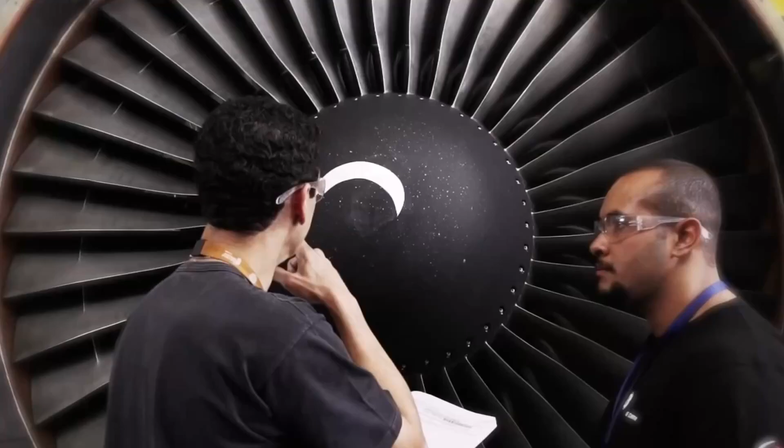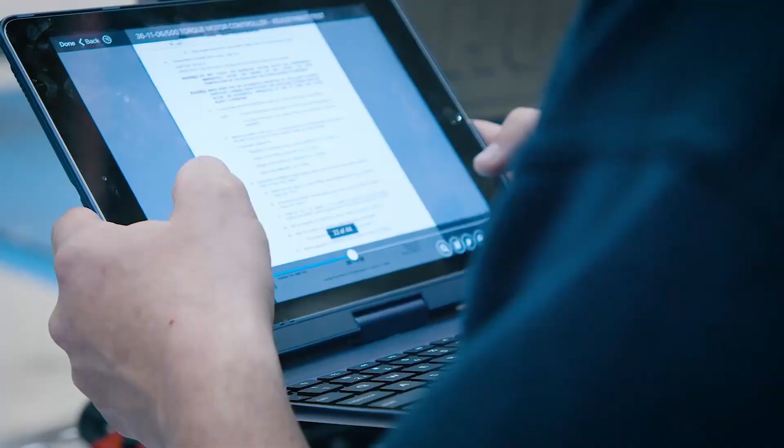When engine aircraft designers get it right, their creations can become legendary. However, history is littered with lost and extremely superb aircraft engines. So in today's video, we are going to show you aircraft engines that might be out of the future.

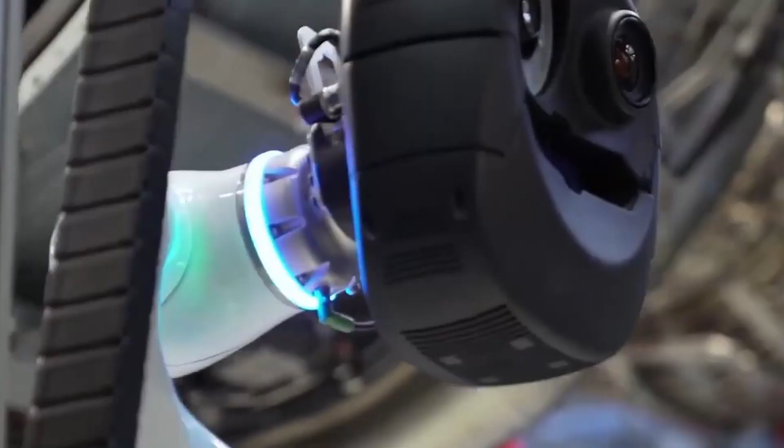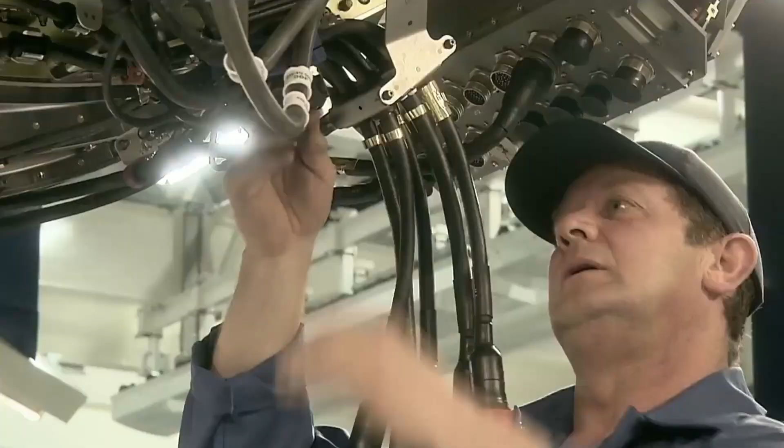First on our list is the engine from CFM International. GE Aviation and Safran have joined forces to form CFM International. It is responsible for the LEAP, dubbed the dominant narrow-body engine of the future, and the CFM56, the best-selling aircraft engine in history. Even though both engine families are more efficient than their predecessors in fuel consumption and carbon dioxide emissions, their potential replacement is being hailed as the future of flight.

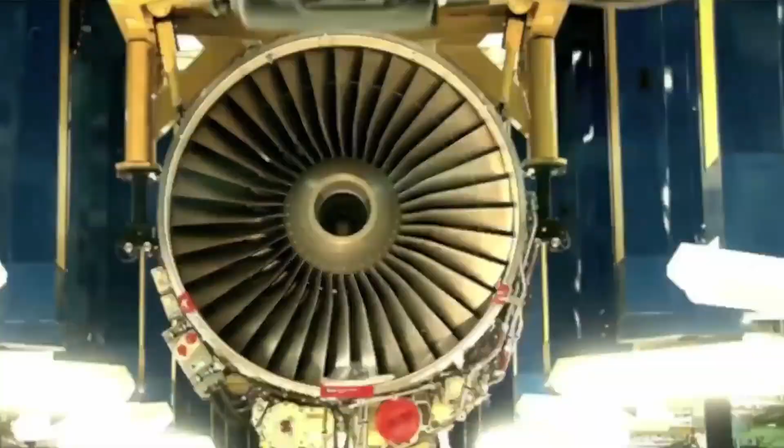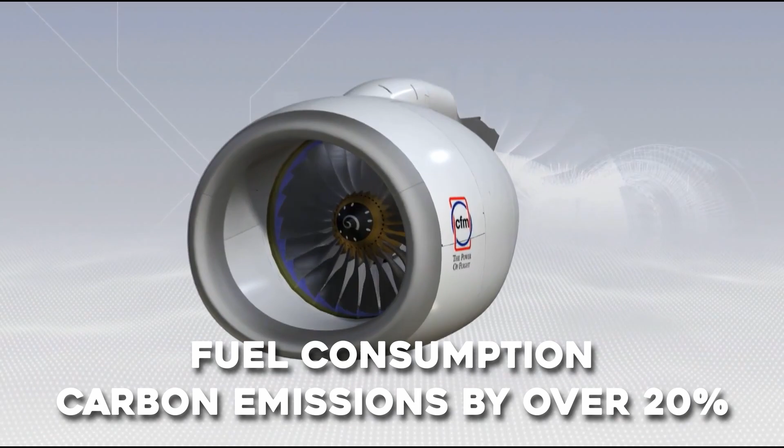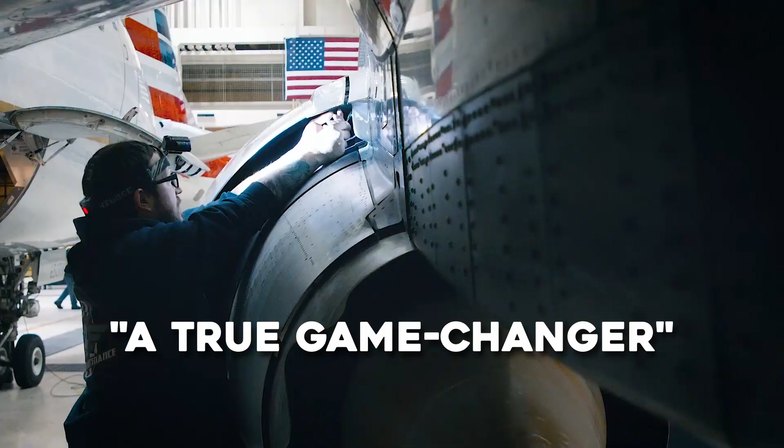In June 2021, CFM introduced its new RISE, Revolutionary Innovation for Sustainable Engines program. According to the company, this program will have produced the next generation CFM engines by the middle of the 2030s. The program's objective is to reduce fuel consumption and carbon emission by over 20%, and it will utilize both sustainable aviation fuel and hydrogen. The CEO of Safran, Olivier Andriès, stated in a video that the program would be a true game changer and write a new chapter in aviation technology.

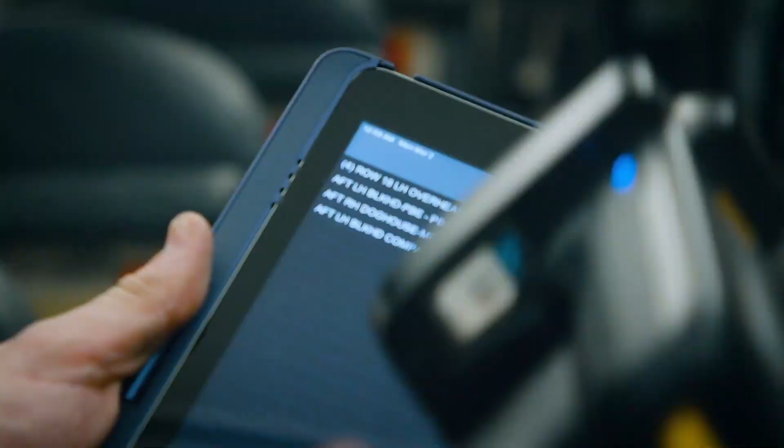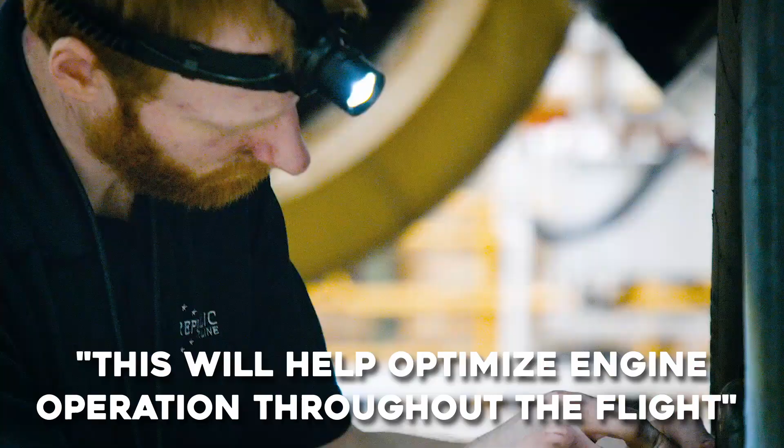The RISE program's open fan architecture is its most important component. The executive manager of systems engineering for the CFM RISE program, Delphine Dijoud, described it as the most ambitious and most useful portion of the plan. This will help optimize engine operations throughout the flight, explained Dijoud, resulting in further efficiency gains and reduced emissions.

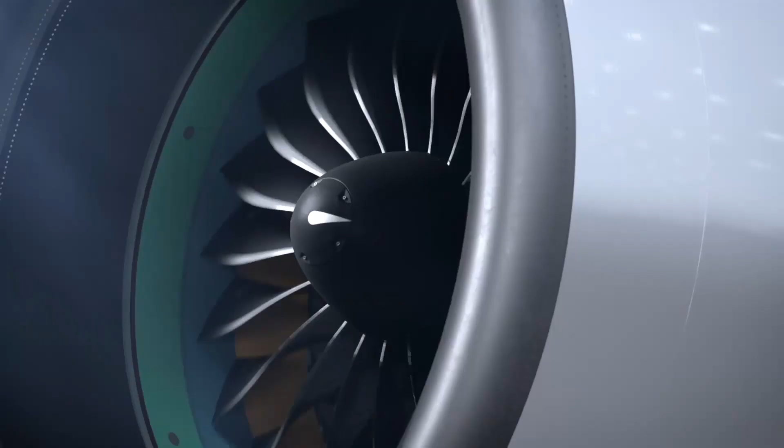Pratt & Whitney produced the second engine on our list. Pratt & Whitney is one of the largest manufacturers of engines for commercial, regional, and military aircraft. On the commercial side, the PW1000G, which powers the Airbus A220 and the A320neo family, is most likely its most recognizable product. There are 6 distinct PW1000G variants.

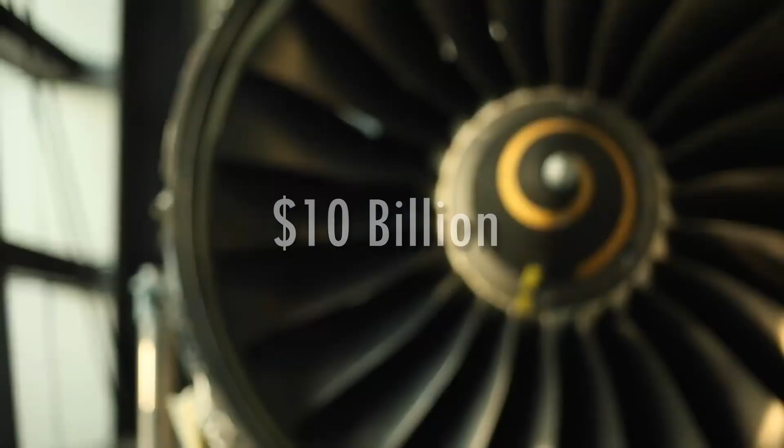Since they all possess geared turbofans, they are also known as the GTF family. More than 1,000 aircraft are equipped with GTFs. Jeff Hunt, the company's senior vice president of engineering and technology, stated that it had invested $10 billion in its geared turbofan technology. Hunt stated to Flight Global, "We have established what I consider to be the benchmark architecture that provides us with the flexibility to adapt as the industry seeks to align with climate change."

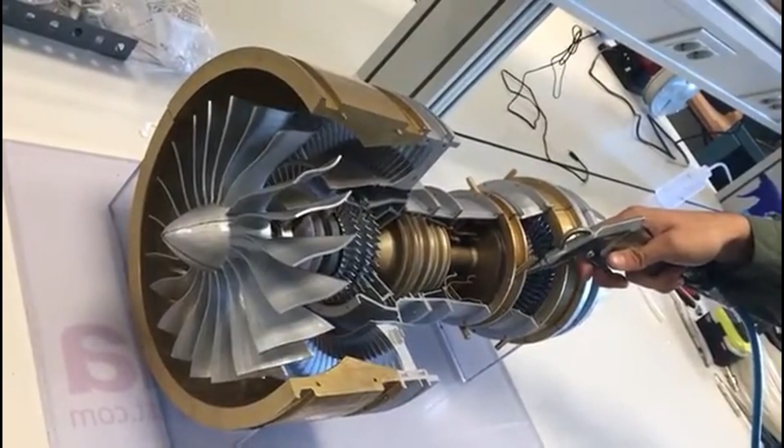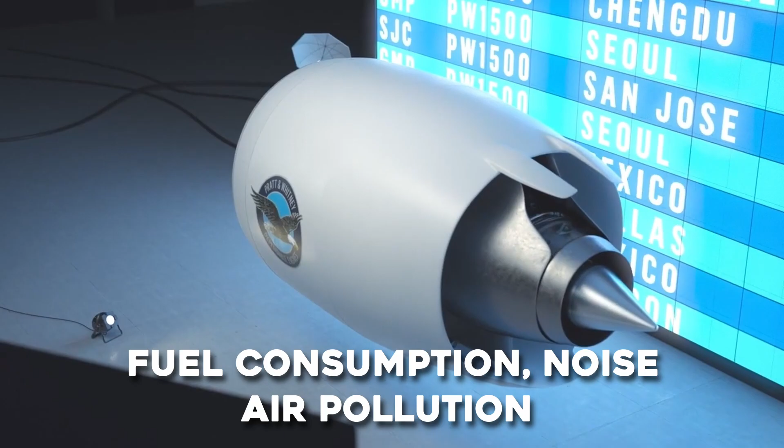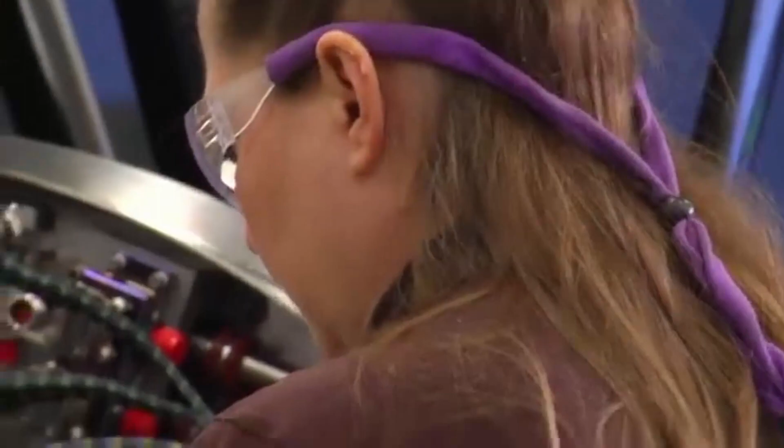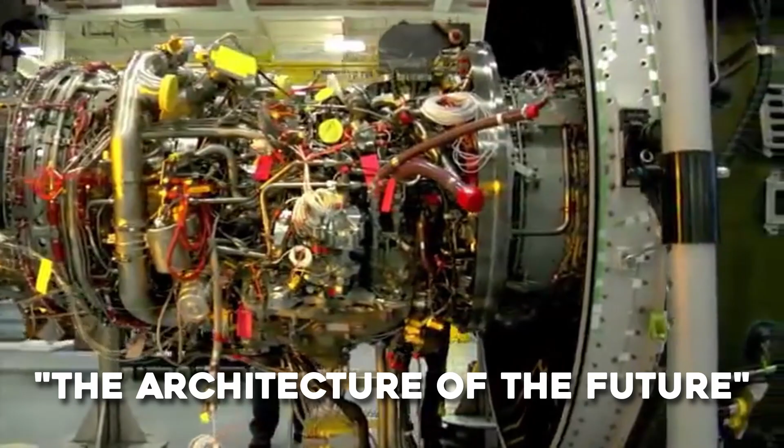Fans in GTF engines rotate more slowly than the compressor and turbine. This gives them the highest bypass ratio in the industry, 12:1. According to the company, the geared turbofan design reduces fuel consumption, noise, and air pollution by double-digit percentages. According to Pratt & Whitney, the fuel efficiency of its engines improved by about 1% annually. Christopher Calio, president of Pratt & Whitney, stated at Raytheon's 2021 Investor Day that the GTF design is the architecture of the future and that efforts are being made to increase the bypass ratio even further.

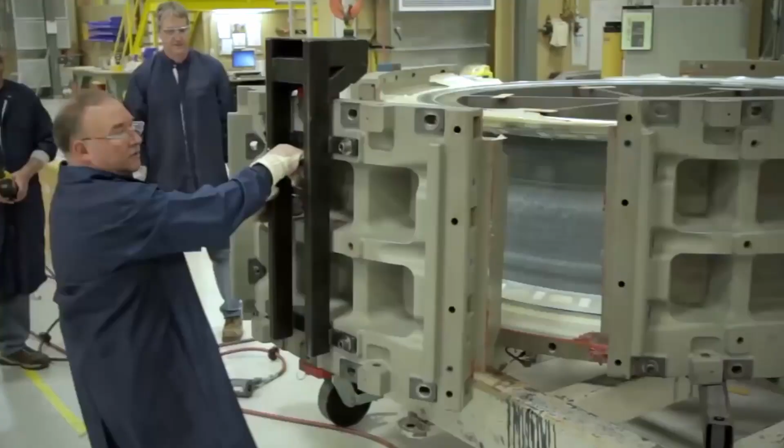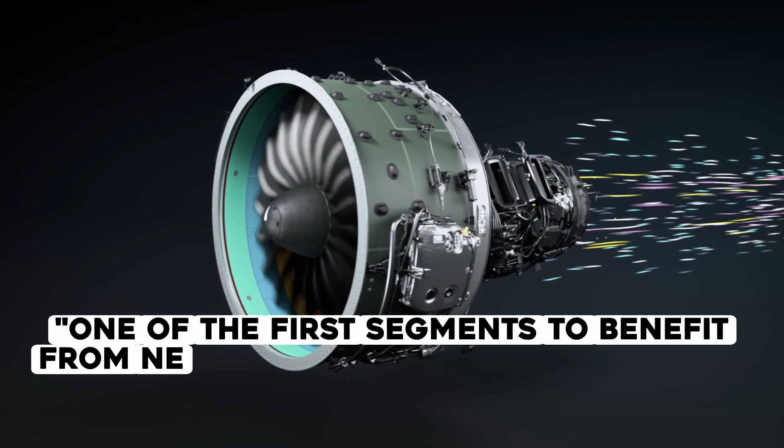In addition to its commercial turbofans, Pratt & Whitney is a significant supplier of regional turboprop engines. It collaborates with De Havilland Aircraft of Canada to develop a hybrid electric turboprop demonstrator. The Dash 8-100 will serve as the basis for the joint venture, and flight tests are anticipated to begin in 2024. According to Pratt & Whitney, the regional market will be one of the first segments to benefit from new, lower-carbon technologies such as all-electric, hybrid electric, and hydrogen-powered propulsion. However, the company also believes that regional turboprop improvements will eventually benefit larger-scale aircraft as well.

Next on our list is the engine from GE Aviation. In addition to the popular CFM56 and LEAP engines it makes with Safran as part of the CFM partnership, GE Aviation also gives commercial airlines several other turbofan engines.

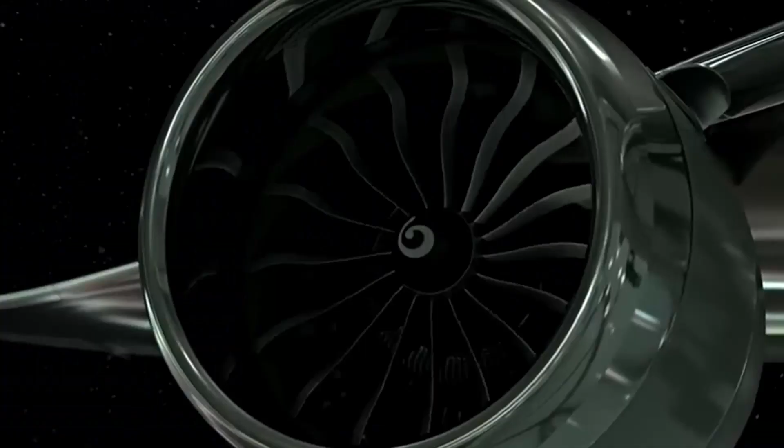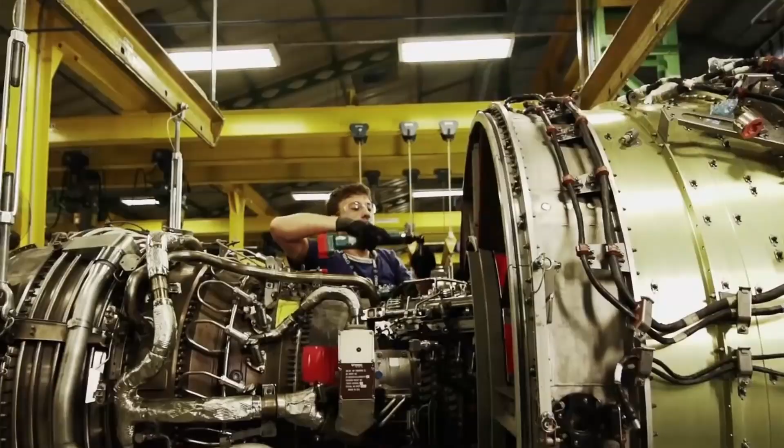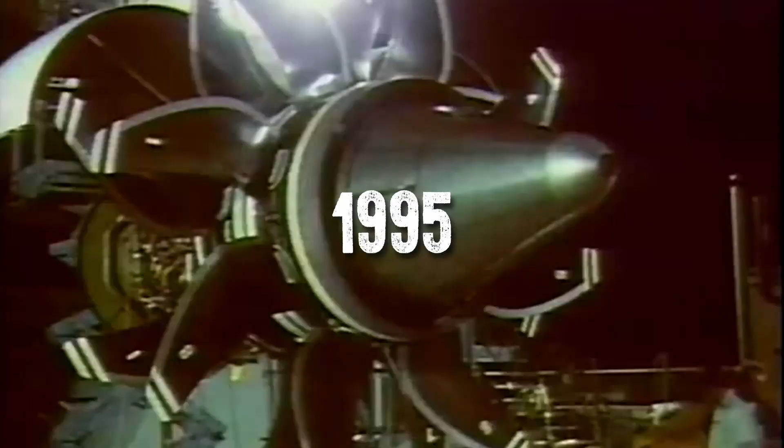The GE90 may be best known for being the first to use composite fan blades. It would also later become the first engine to incorporate an FAA-approved 3D printed part. Even the Museum of Modern Art in New York exhibited the blade's curved form as a perfect example of modern engineering, design, and beauty. When it entered service in 1995, the GE90 was the world's largest jet engine.

By 2020, the GE90 engine that powers the Boeing 777 family will have logged more than 100 million flight hours.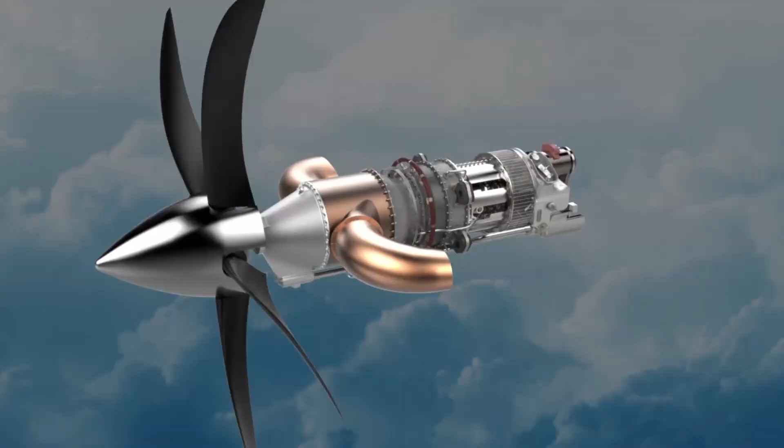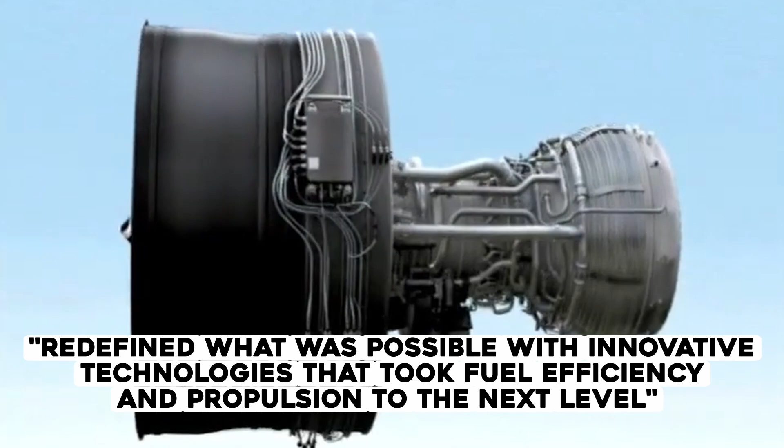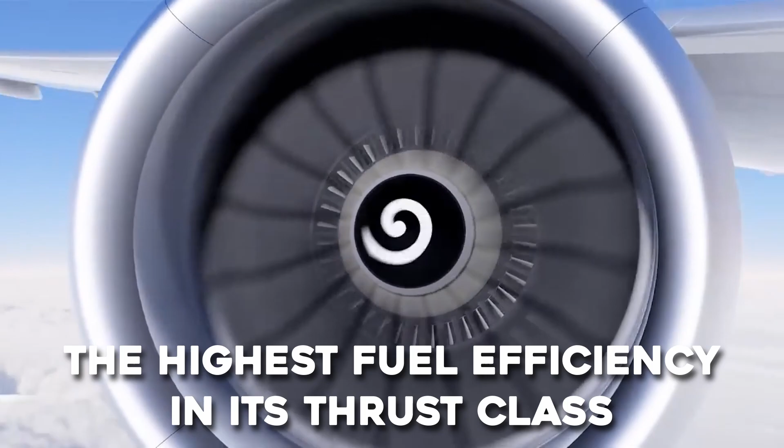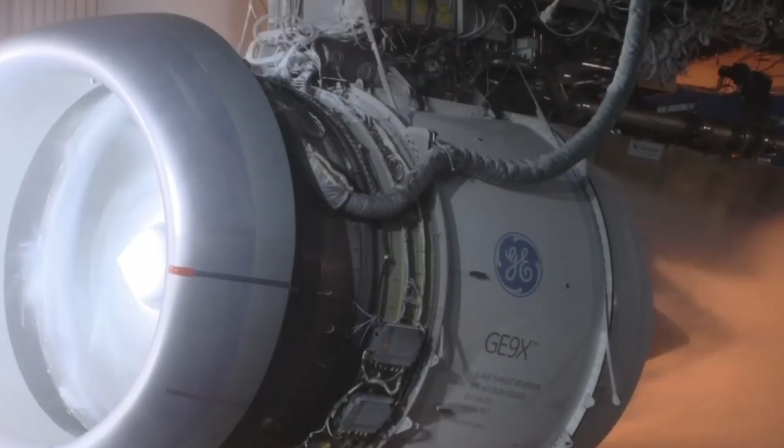The Boeing 787 and 747-8 are equipped with GEnx engines. The GE9X is the newest engine from GE Aviation, and according to the manufacturer, it is the most fuel-efficient engine it has ever produced. The GE9X engine was designed for the Boeing 777X. It consumes 10% less fuel than the GE90 and emits fewer NOx than any other GE engine.

The CF6 engine from GE Aviation is still used in many commercial aircraft, including the Airbus A330 and the Boeing 747 and 767. The 5 variants of the CF6 have logged 115 million flights.

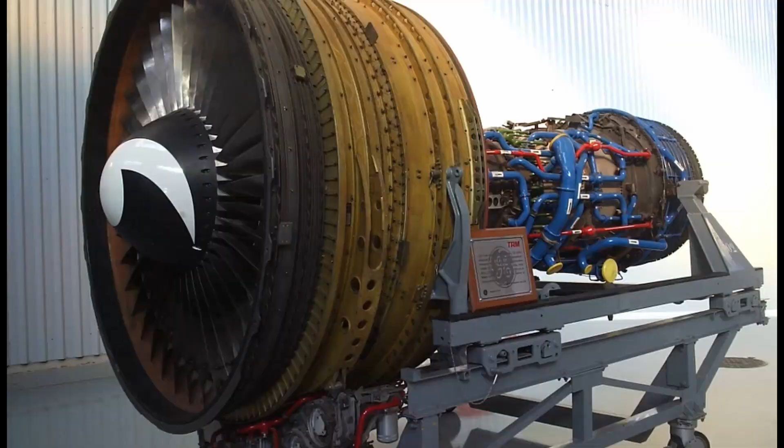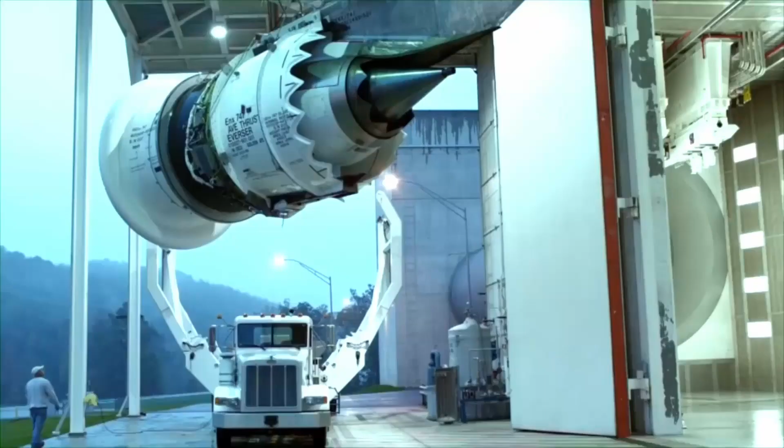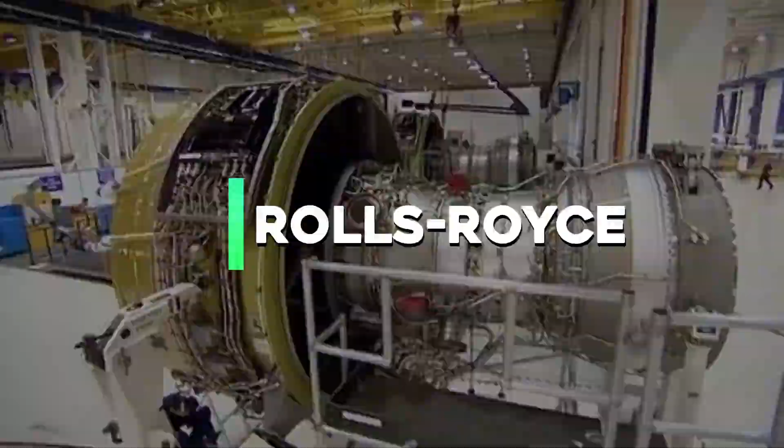Finally, the last engine manufacturer on our list, Rolls-Royce. Rolls-Royce is best known for its high-bypass turbofan Trent engines, which power aircraft such as the Airbus A330, A330neo, and A380, as well as the Boeing 777 and 787.

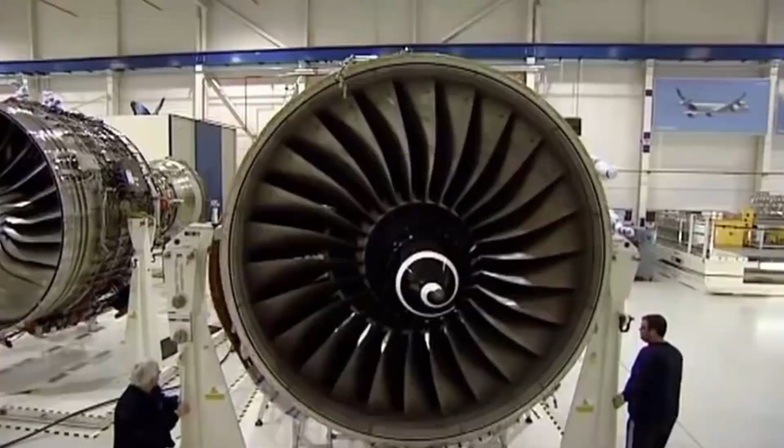The British company announced earlier this year that it had begun manufacturing the UltraFan, the largest jet engine in the world. According to the company, the UltraFan will contribute to redefining sustainable air travel for decades to come.

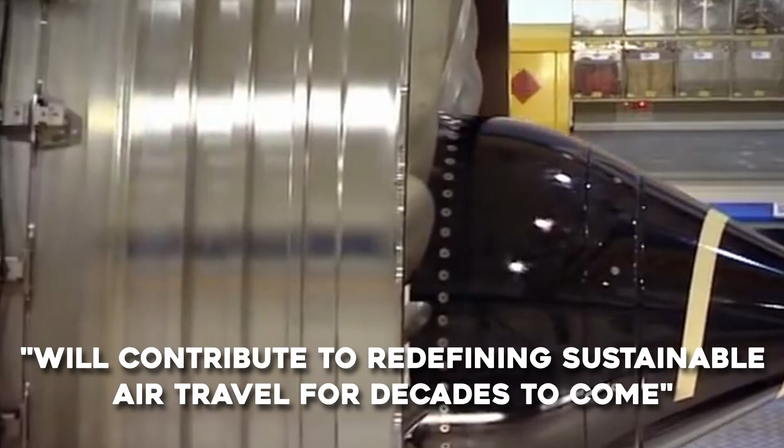The 140-inch fan on the UltraFan demonstrator engine, which is currently being assembled, is the largest in the industry at 3.5 meters. When the UltraFan power gearbox reached 87,000 horsepower, or 64 megawatts, it set a record for the aerospace industry.

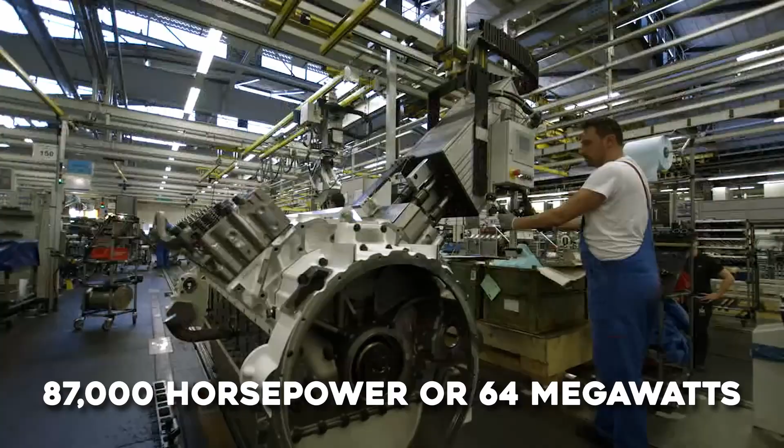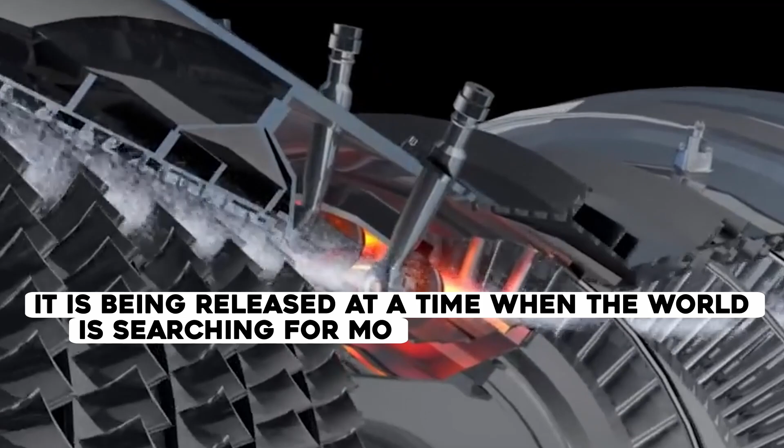Chris Cholerton, Rolls-Royce President for Civil Aerospace, stated, 'UF001, our first engine demonstrator, is coming together, and I can't wait to see it constructed and ready for testing. It is being released at a time when the world is searching for more environmentally friendly travel options in response to COVID-19, and it makes me and my team very proud to be part of the solution.'

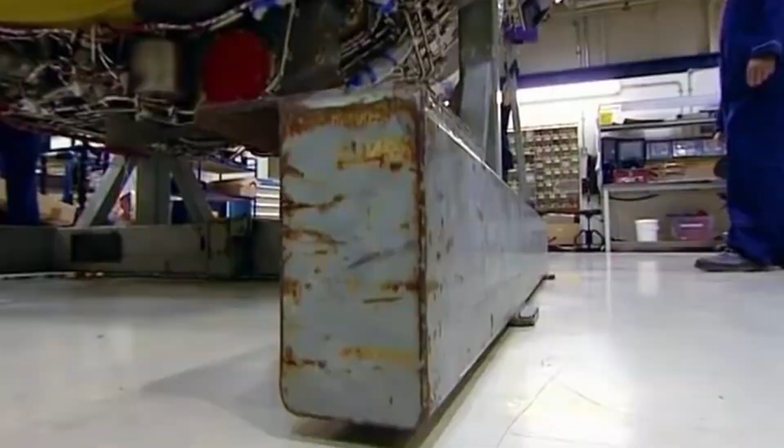A new family of UltraFan engines is expected to enter service around 2030, and the company claims that its new product will hasten the transition to sustainable aviation fuel.

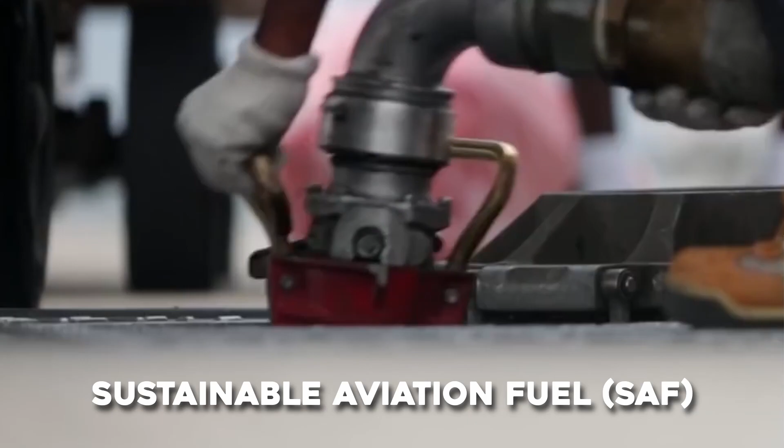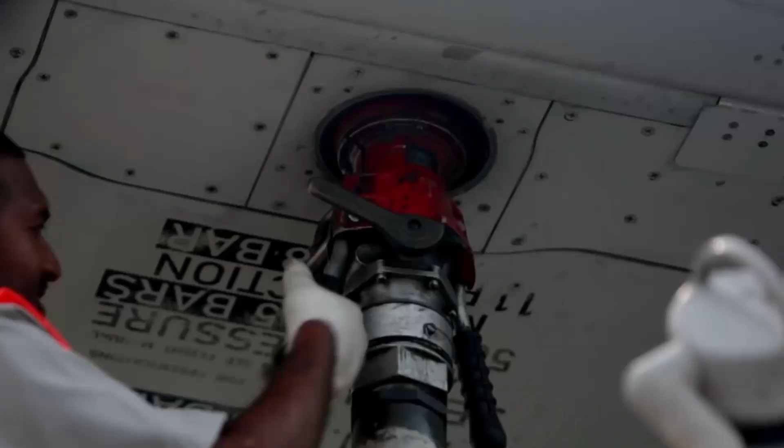The initial test of the UltraFan will be conducted at 100% SAF. Current regulations allow a maximum 50-50 mixture of jet fuel and SAF in aircraft engines, but airlines use less than 1% SAF in their operations.

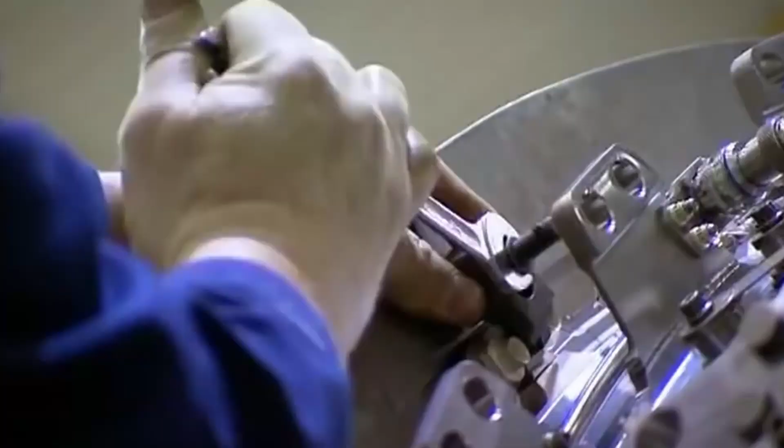The UltraFan will consume 25% less fuel than the first-generation Trent engines. Its manufacturer has stated that scalable variants will eventually be available for narrow and wide-body aircraft.